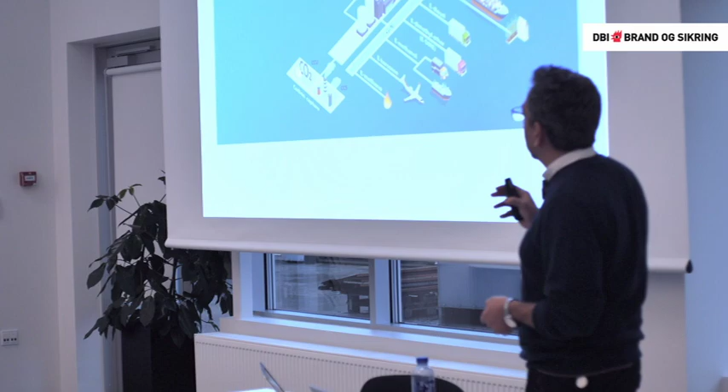As my colleague mentioned, power-to-X is a crucial solution to replace fossil fuels because of the climate challenges. In power-to-X, renewable energy is used to split water into hydrogen and oxygen. That hydrogen can be used directly as a fuel or as a raw material in different industries, or can participate in synthesis processes.

Hydrogen from electrolyzers is combined with nitrogen in a synthesis process to produce ammonia. Ammonia can be used as a fuel or in fertilizer processes. Or hydrogen can be combined with CO2 captured from different industries in synthesis processes to produce carbon-based fuels. Methanol is one of the carbon-based fuels. In this project, our focus is hydrogen, ammonia, and methanol as fuels.

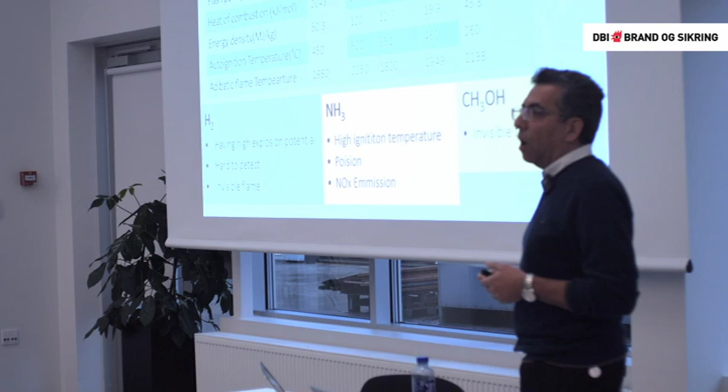And also with human senses, detection of hydrogen is impossible. It's colorless, odorless, tasteless, and because the density of hydrogen is very low, we cannot add any additive, like the mercaptan that is added to natural gas, to make it detectable by human senses. And also hydrogen has an invisible flame.

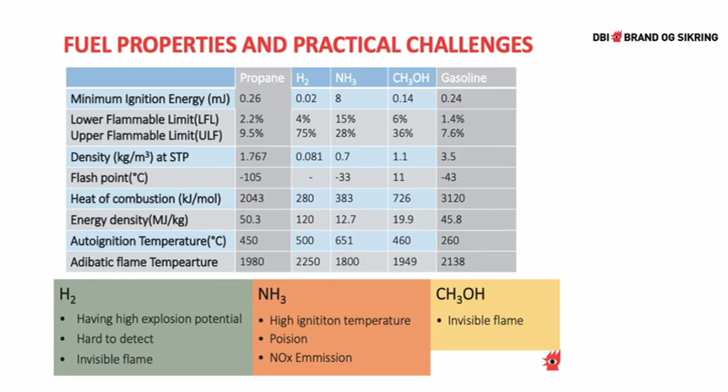Ammonia has a high ignition temperature. It means when we want to burn ammonia, before combustion the temperature must go up. I mean, it needs preheating. And ammonia is poisonous, and in some cases leads to NOx emission. Now a lot of researchers are working to optimize ammonia combustion. And the main challenge for methanol is the invisible flame, and my colleague Adina will talk more about methanol.

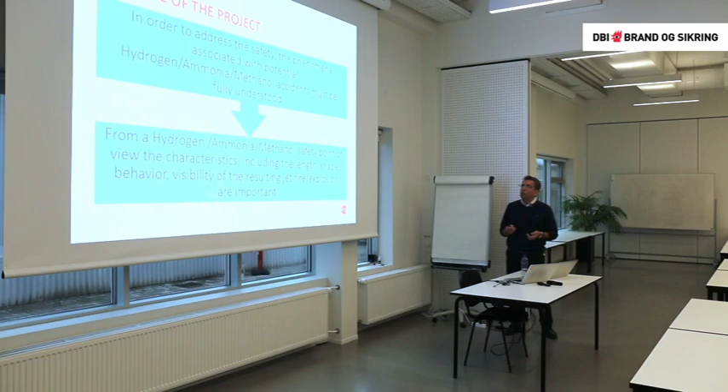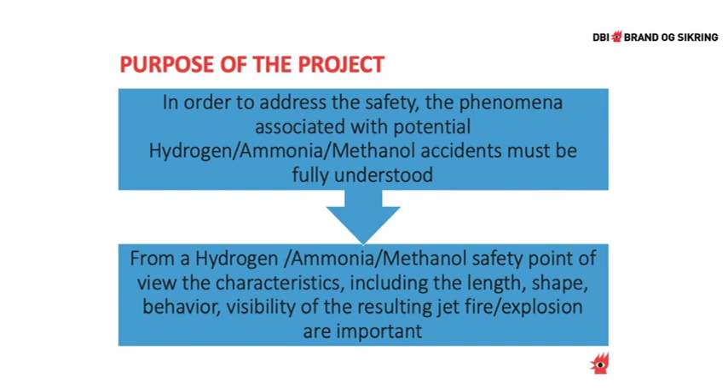And this is what we want to do here: in order to address safety, any potential accident related to these fuels must be fully understood. So we want to do some experiments to show flame behavior, explosion behavior, and what the consequence of any accident is. So stepwise in the project, we divided it into two subjects, burning and explosion, for different fuels.

For example, for hydrogen, the first step is burning hydrogen at very small scale, at low pressure. The main purpose of this step is to learn to handle hydrogen. Then step 2 is jet fires of hydrogen at different pressures, with different nozzle diameters. In this step, we want to measure, for example, flame length, and collect data for our future modeling simulations. And for ammonia, we want to burn pure ammonia at small scale.

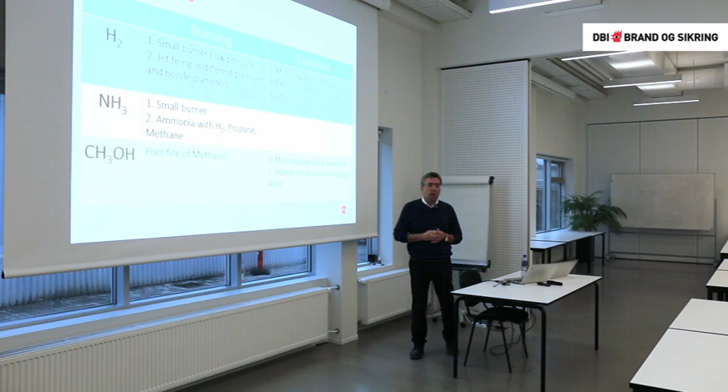As I mentioned, one of the challenges for ammonia is its high ignition temperature. Mostly now, ammonia is mixed with other fuels, for example hydrogen, propane, methane. So here we want to burn ammonia with other fuels to see the flame behavior and other things. And for methanol, we have pool fires of methanol at different scales and with different concentrations.

In the explosion experiments, the first step is micro explosions of mixed hydrogen and air. The next step is larger scale. In the second step, we want to collect data, measure pressure, and use a high-speed camera. For ammonia, we don't have any plan for explosions, and for methanol, micro vapor cloud explosions and vapor cloud explosions at larger scale.

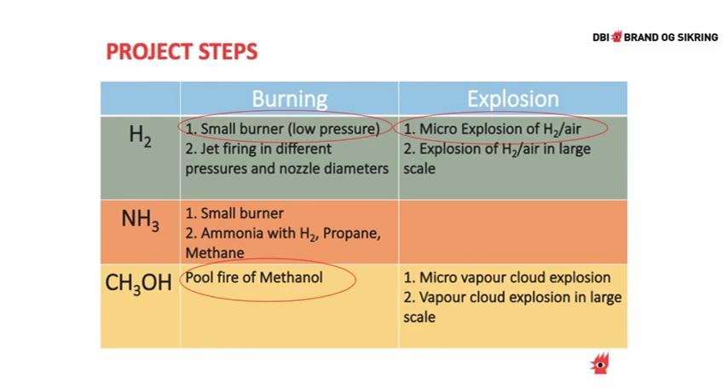Today, I want to show some results for a small burner for hydrogen and micro explosion, and my colleague will present pool fire of methanol. For demonstration of the hydrogen burner, we built a setup, and we also used propane as a reference to compare the flammability and flame behavior of hydrogen and propane.

The setup parts are gas cylinders, hydrogen and propane, regulator, burner, small burner, igniter, portable gas detector for safety, and thermocouples. And for monitoring, we use a regular camera and a thermal camera. And also, we measure the temperature in different positions of the flame.

Here, we burn hydrogen in 3 different conditions: indoor daylight, outdoor daylight, and dark room. This is the flame of hydrogen indoor. It's a little visible, and we try to keep conditions for propane and hydrogen approximately the same. But you can see visibility of propane is much, much more than hydrogen.

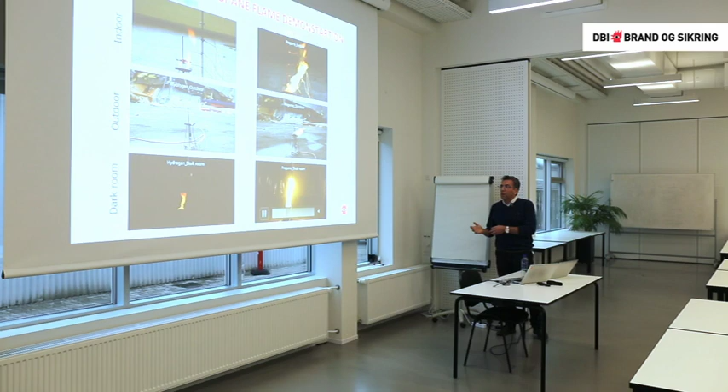And the interesting thing is when we burn hydrogen outside, it's very difficult to detect. It's completely invisible. And this is the result in the dark room. As I mentioned, one of the purposes is to see invisibility and other properties of the flame.

And also here, you can see it's orange color, but when we go to the reference literature, we can see that they wrote that it's pale blue. But I think this color comes from some impurities from the burner.

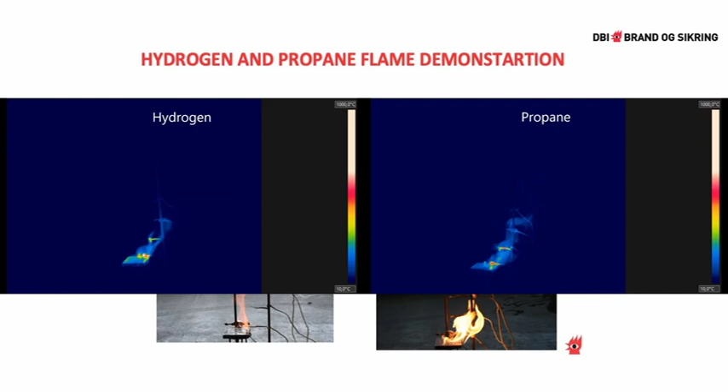And this is some results, a video with thermal camera. And also we measure the temperature in different positions of the flame. The green one is the results of hydrogen, and the red is the results of propane. I put here only the results of T1 and T2. You can see here that the temperature of hydrogen is higher than propane. And another observation from the burning, we understood that the flame speed of hydrogen is higher than propane.

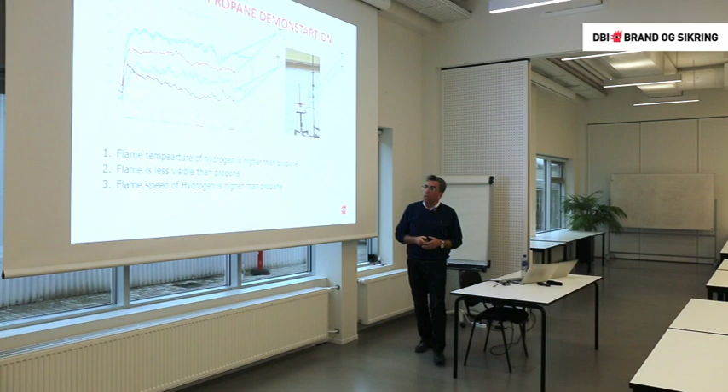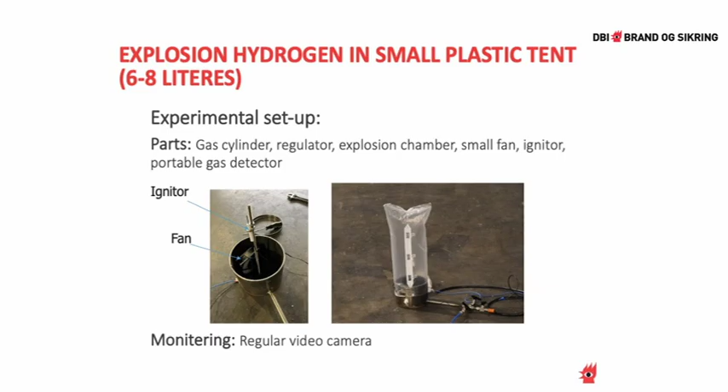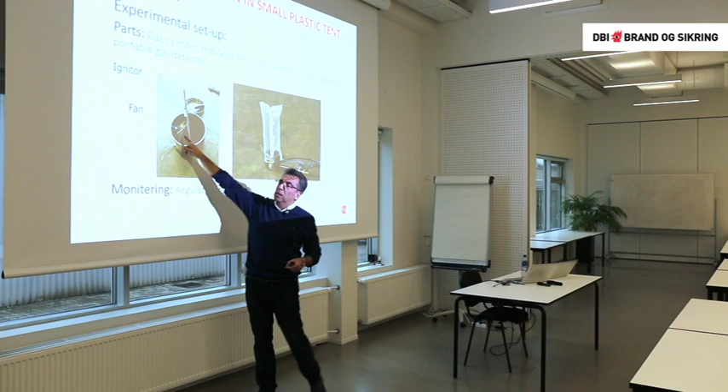And the interesting part of the project is micro explosion. For this reason, we built again a small setup. Again, a gas cylinder, regulator, explosion chamber with pipe and 3 different valves. We add hydrogen and compressed air from here. It's a plastic tent of 6 to 8 liters. And also we put a fan because the density of hydrogen is very low, and we want to have good mixing inside it. And we put an igniter, adjustable to change the position of the igniter.

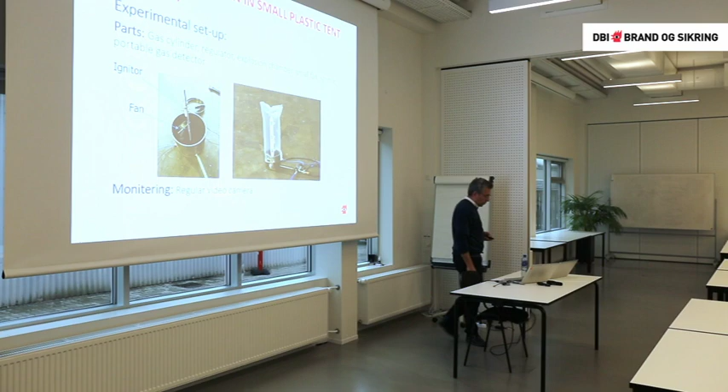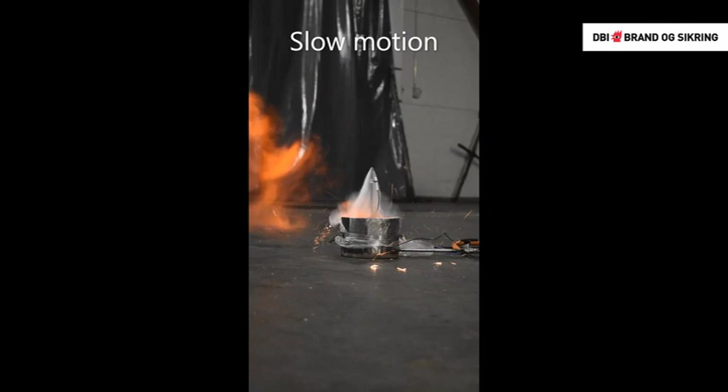And we only use a regular camera for monitoring. And this is the video from the explosion. It's very fast. It's very fast reactions. And also what I found out from slow motion, the flame that comes from the explosion is large.

And also there are differences from burning in the burner. I mean the flame color, it's completely reddish color. And I don't know. We have to do some more experiments to find the reason for the differences in colors in explosion and burning. And another observation is we have 2 zones of explosion. The explosion is divided in 2 from the point of the igniter.

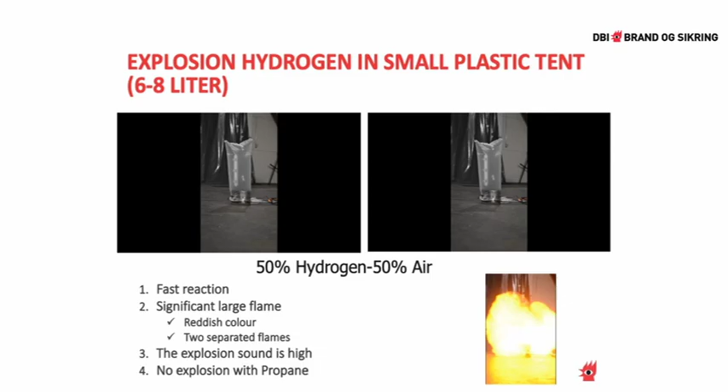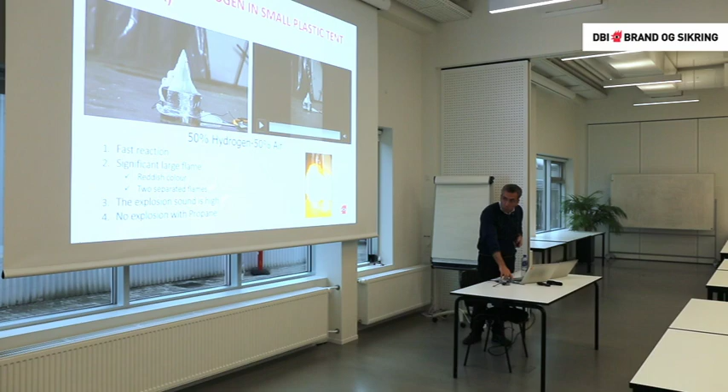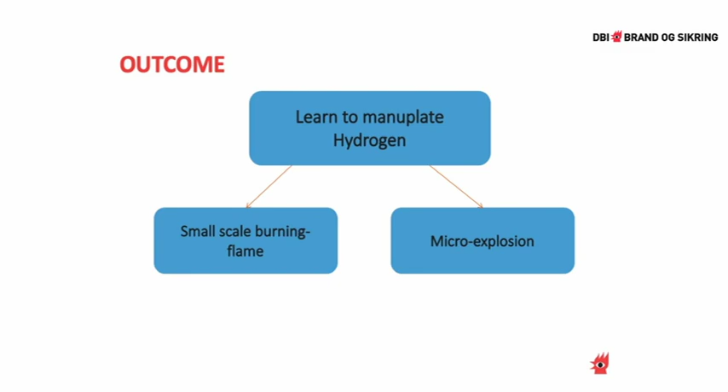Until now, we learned to manipulate hydrogen with burning of hydrogen in a small scale and with having a micro explosion. For the next step, we want to do jet firing in different pressures and nozzle diameters for the burning process. We want to measure length of flame, collect data for modeling, and monitor obstruction and environment for jet firing also. For explosion, we want to measure blast pressure, record with a high-speed camera, collect data for modeling, and monitor obstruction and environment.

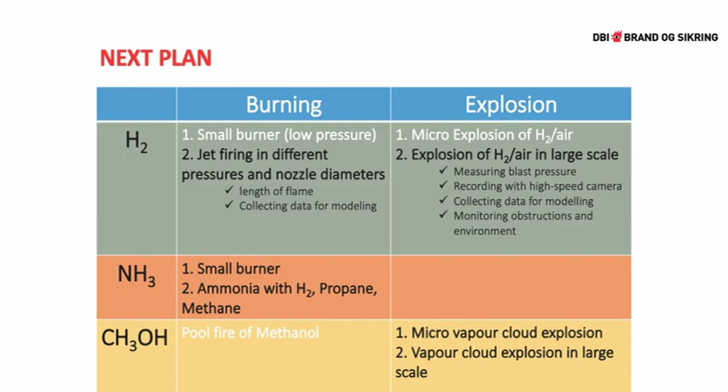For ammonia, we want to burn pure ammonia and ammonia with other fuels. And for explosion of methanol, we want to first do a micro vapor cloud explosion to learn how we can manipulate methanol, and then go to larger scale.